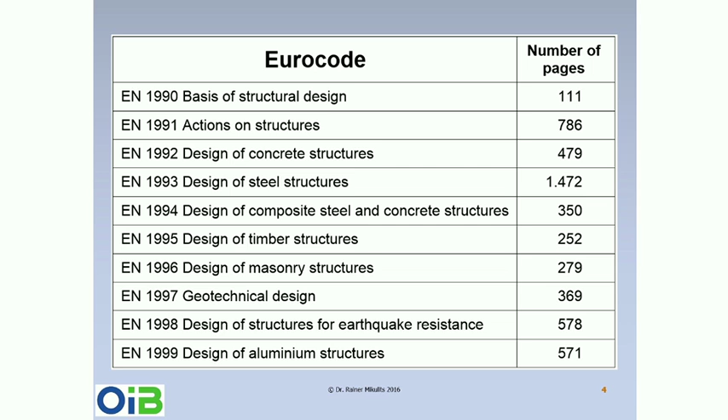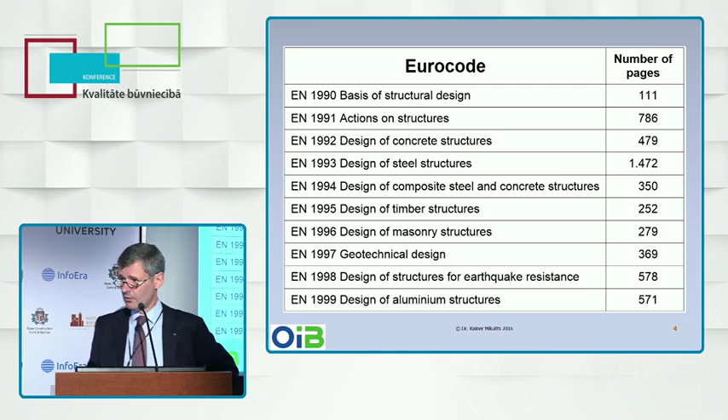You can imagine that if you don't work daily with these codes, you will struggle. A master builder who uses the Eurocodes perhaps once a month will never really be able to do it, because he does not have the time to read all these pages. So the idea was different from the German approach, where the initiative wants to influence the next generation of the official Eurocodes. Our idea was to produce handbooks, simplified handbooks.

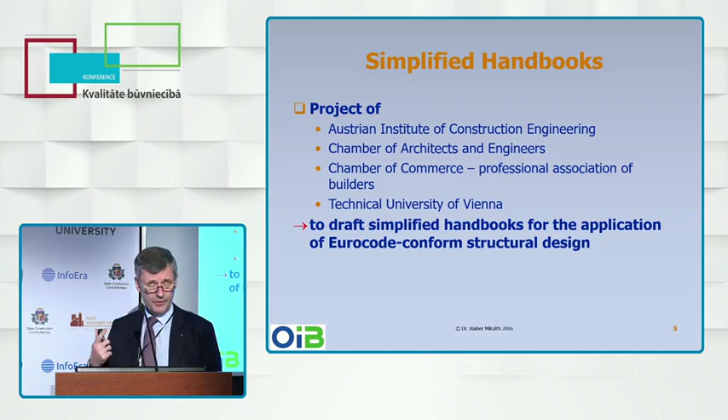That is a project which is not only ours as the Austrian Institute of Construction Engineering; also involved are the Chamber of Architects and Engineers in Austria, the Chamber of Commerce, especially the Professional Association of Builders, Master Builders, and the Technical University of Vienna. The task of this project is to draft simplified handbooks not for the application of the Eurocodes, but for the application of Eurocode-conform structural design methods. So we are developing simplified design methods which are still Eurocode-conform.

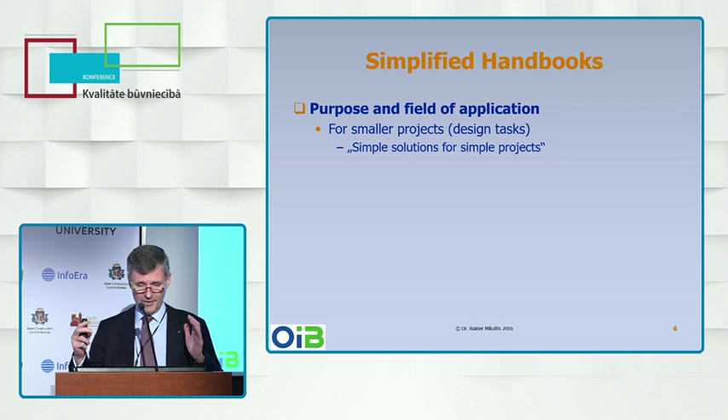How should it work? First of all, the purpose and the field of application: it should just be for smaller projects. If you have a large project, no way, you should use the Eurocodes, and that will be done by a specialist who is able to do it, and he has no problem. But for the small projects, we would like to have simple solutions. So the slogan is simple solutions for simple projects.

We also think that it is improving the understanding of the subject, because if a master builder is designing a small residential building and just putting the figures into the software, pushing the button, and he gets a result, he is no longer able to judge with a sort of plausibility control whether the result is correct or not.

So we would like to come again to the slogan: use your brain before applying the software. Just calculate a little bit and then look whether the result of the computer is plausible or not plausible. And these handbooks should also increase this understanding of the subject.

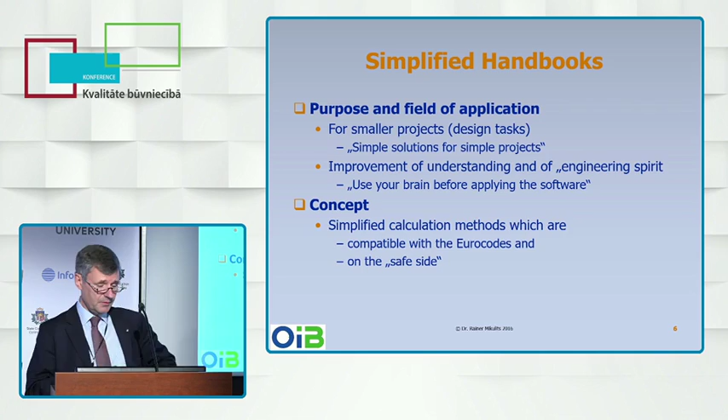The concept is simplified calculation methods, partly radically simplified calculation methods, which are nevertheless compatible with the Eurocodes, but on the safe side. So if you apply these methods, you fulfill all the legal requirements which there are in Austria. The principles are, first of all,

elimination of all cross-references. If you apply the Eurocodes, often you have to switch to another page, to another chapter of the same Eurocode. You have to look to another Eurocode, and then you have again a reference, just in order to get one value. So it's very awkward. We would like to avoid all cross-references, so everything should be in this one document, all in one.

And all in one would also apply to the whole project, from the foundation to the roof. So in order to avoid that, for example, for a smaller residential building, you need to apply several parts of the Eurocode, or several Eurocodes. No, you should just apply this one handbook, and you have everything in this handbook.

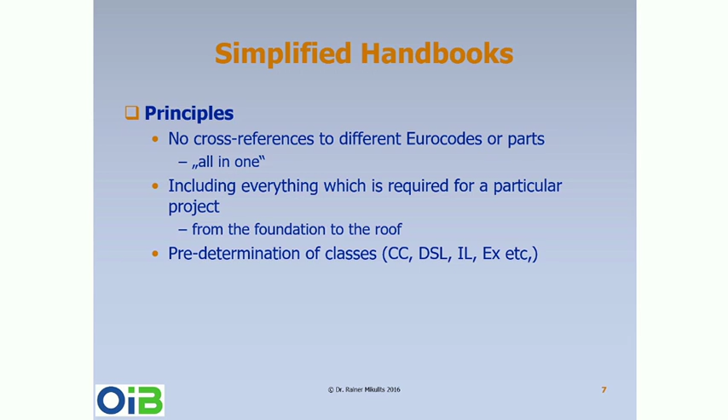Also, with regard to the many classes which there are in the Eurocodes, the consequence classes, the design supervision levels, the inspection levels, the execution classes, and so on, these classes would be determined. So there's a description of the kind of project and an indication which class you should apply.

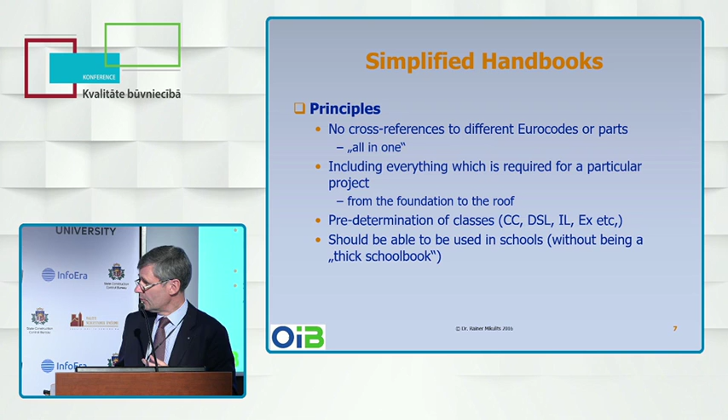And also an important principle, the handbooks should be written in a manner that they also can be used in schools, but not as school books. It should not be school books with lots of explanations, but a tool, so that also in the schools where they have a problem with getting the full information of the Eurocodes, they can get a flavor of the Eurocodes by using these handbooks in their education.

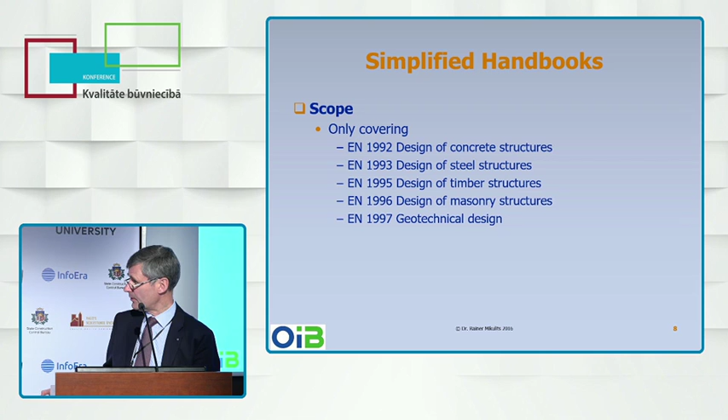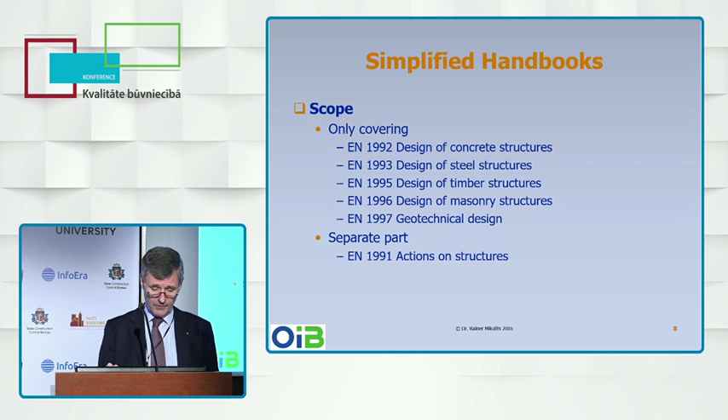With regard to the scope, they will only cover these parts: concrete structures, steel structures, timber structures, masonry, and geotechnical design. There will be a separate part with regard to the actions on structures. That will be a handbook on its own. And the basis of structural design, Eurocode 0, and the design of structures for earthquake resistance, Eurocode 8, will be integrated into each part.

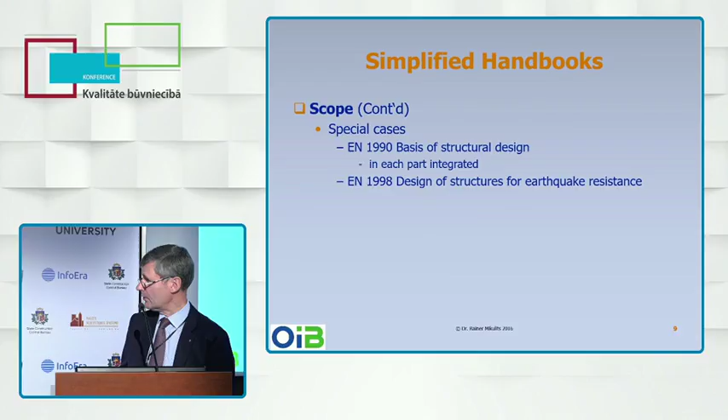So if we have a part for, let's say, small residential buildings, we will have all information which is needed with regard to Eurocode 0, for example, which consequence class and design safety level and so on. And also everything which is required for Eurocode 8 will be integrated in the particular handbook.

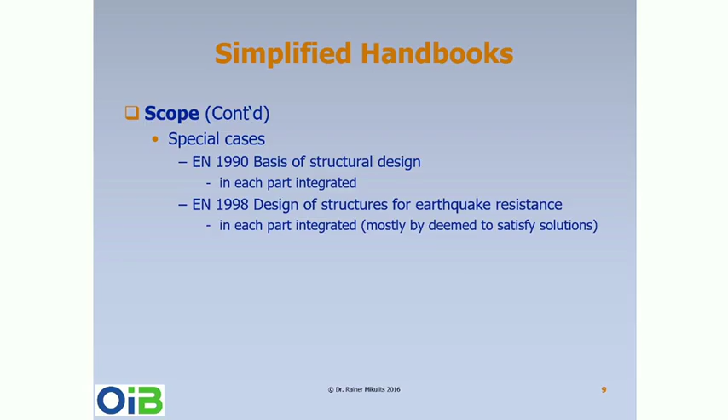And with regard to the earthquake resistance, this will not be a calculation, but a deemed-to-satisfy approach. So there will be a description of the structural measures which need to be taken in order to be, again, on the safe side and to be sure that the Eurocode would be fulfilled.

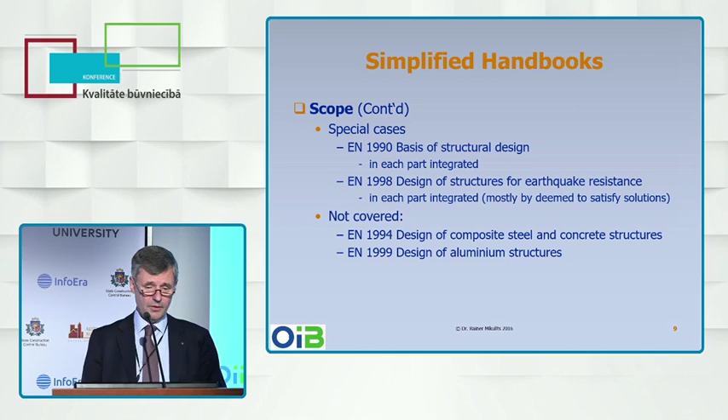That is more or less what I wanted to tell you. Perhaps not covered, of course, are composite steel and concrete structures and aluminium structures. We presume that this is not a task for the small master builder, but there are specialists doing the work and they can apply the Eurocodes fully, so there is no need.

I hope I have not... I started late.

Wonderful. So, that was what I wanted to tell you about our Eurocode project. I hope it is of some interest for you. And thank you very much. I forgot to say, we are restricting it to CC1.